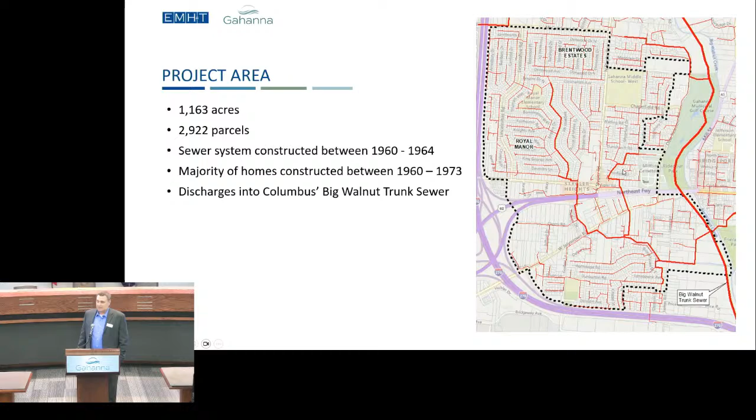Again, I'd mentioned we discharge into the 84-inch, and the red line through the municipal golf course and heading south is the 84-inch trunk line that is owned and operated by the City of Columbus. And the red lines that you see on this map are indicative of the sewer system servicing the entire service territory. So as far as an overall timeline of events, as we went through the subdivision being built, homes then going on the market.

In 1990, there were similar events with backups in basements, as well as depressed driveways. So the city at the time evaluated and worked to mitigate those depressed driveways that otherwise tied into the sanitary sewer system, as well as any foundation drains in that area. It was in 1963 that the City of Columbus adopted an ordinance where the collection system would not permit clean water to enter into the sanitary sewer system.

So any of the rainwater that went into the foundation drains along the perimeter of your property, pre-1963, and even a little bit after that, as that programmatically got implemented across the region, some of the homes had foundation drains tying into the sanitary system.

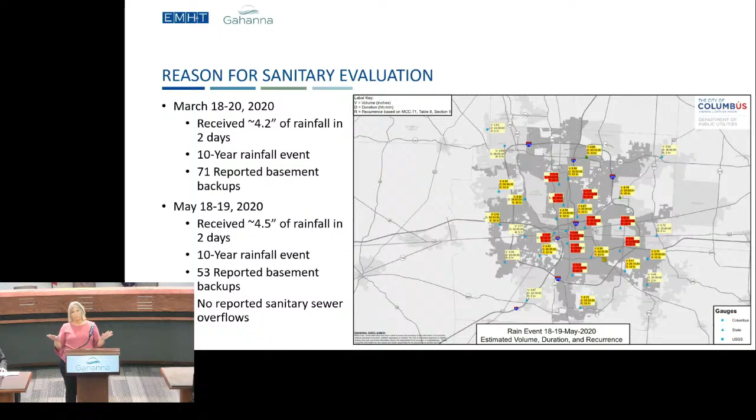But what was important here is we had Gahanna 71 in one event and 53 in the other. There are other communities, one had 700 water in basement complaints in that particular event. So it was very widespread. This wasn't isolated to Gahanna. I just wanted to give you guys that reference. One of the other communities had over 100 in that event. So it was all over. People were getting water in their basements because the system was just full.

So let's talk about the sanitary sewer evaluation, phase one. What took us so long to get here, right? In order to determine what's happening in that system, we have to install flow meters in the actual pipes that will record how the flow comes up and down through your regular average daily flow.

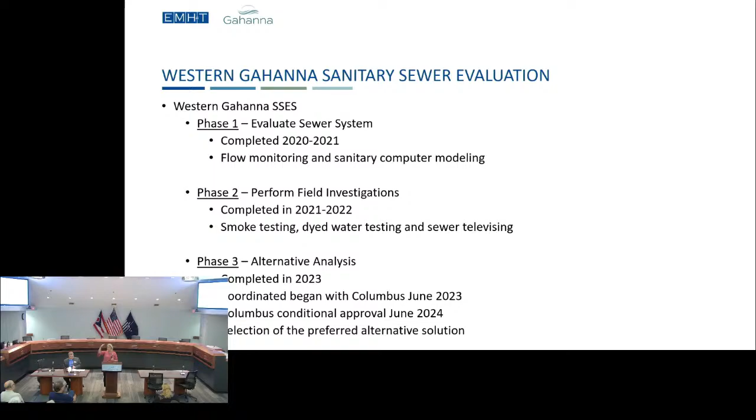So, you know, when you get up in the morning, everybody gets up in the morning, they take showers, water usage goes up, and then it comes back down as people go to work, and then it comes back up in the evening when people are home. So you want to see that, what's called a diurnal pattern, is how the usage fluctuates during any given day, and then what you also want to see is how that system responds when it rains.

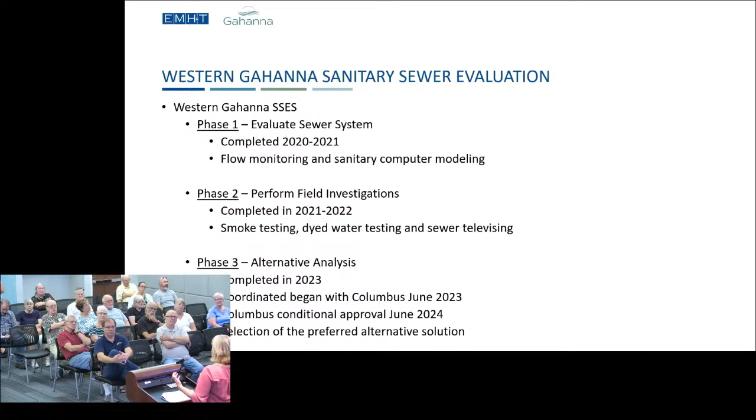So that flow meter data placed throughout the city is what tells us how the system's responding to rainfall. So we take that rainfall data and we put that into a computer model, which will then simulate what's happening in the system since we can't really see it. It's all underground, right? Nobody thinks about the sanitary sewer until it backs up. So that was the first phase.

Flow monitoring periods are anywhere from 3 months to a year, depending on what kind of rainfall data you get during that period. Sometimes Mother Nature's kind, you put the meters in and you get a really big rainfall event, and that happens really quickly, and other times you're in there for a year and you're still struggling to get that rainfall event. So the monitoring period and then developing the flow model took some time.

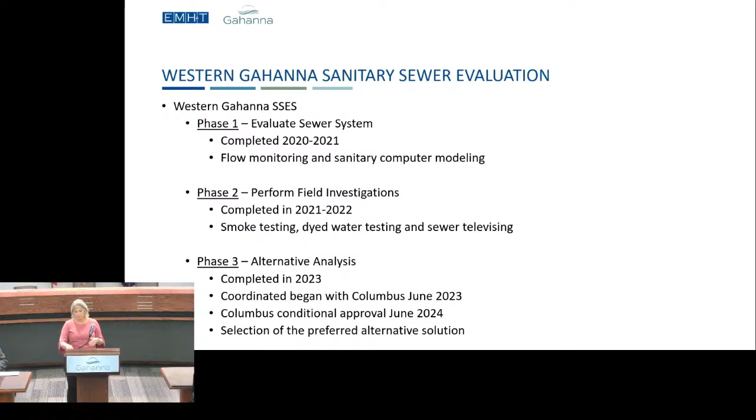Once that was done, we did some field investigations from 2021 to 2022, trying to identify if there were any clean water connections, storm sewers, downspouts, foundation drains connected to the sanitary sewer system. We found none. And then once we went through that, looking for sources of I&I, then you go into the alternatives analysis. Once we try to figure out where's the rainfall coming from, then we go back to the computer model and try to determine how can we solve the surcharging problems. So I'll get into the details of what we did in the next few slides.

Field investigations, what did we do? We went out and smoke tested, looking for any major connections, storm sewers, downspouts, those types of things. So what we do, we put a smoke blower on the sanitary sewer system, we fill the sanitary sewer. Maybe some of you guys remember us being in the area, you might have got some smoke in your house, and that tells us if the smoke can get through, so does the sanitary sewer, so it follows the path of least resistance. So that can show us if there's cracks in the laterals, if the foundation drains are connected, if roof downspouts are connected, or if any catch basins are connected.

Then we followed up with dye testing. One of the things that we see often is where sanitary and storm sewers are running parallel in a roadway, and they usually put like compacted granular backfill, so it's usually like a gravel backfill, which is very porous. And you've got a storm sewer that's not designed to be watertight, and you have a sanitary sewer system that's supposed to be, but a lot of times the flow will pass back and forth between the two of those. We didn't find that either.

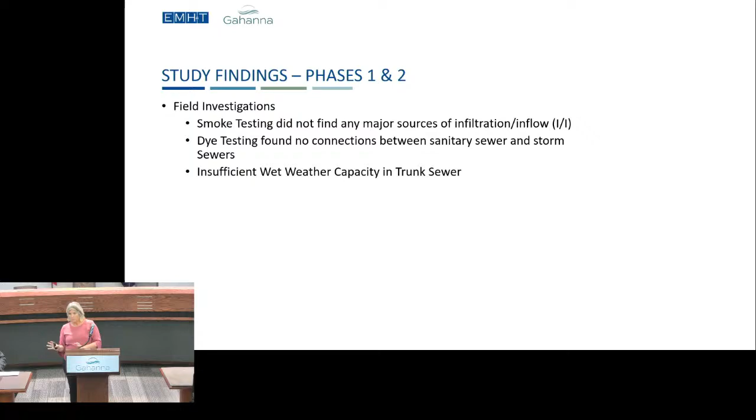I&I, you hear people talk about I&I, that's called inflow and infiltration. Inflow is like a direct connection. That is a downspout, a catch basin, a foundation drain. That's inflow, a direct inflow. You usually see a really high peak that comes in. We did not find those because of the previous work that you guys did in 1990 when there were large backups. They mitigated all of that. They went in, they removed foundation drains. So it wasn't surprising that we didn't see that type of response in the system because all that was previously mitigated by the city.

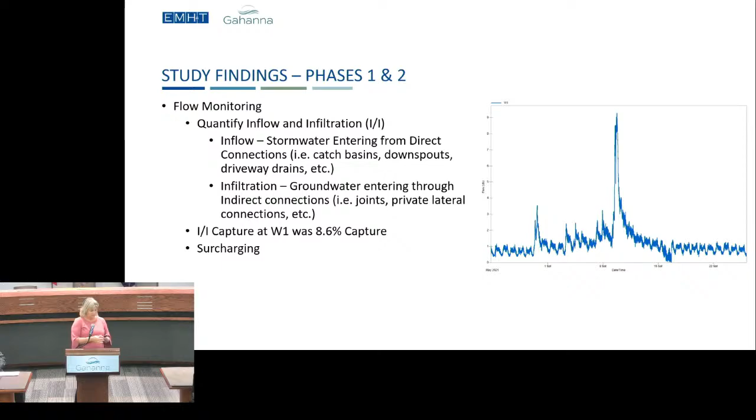So one of the things that we always look at is when the sewer was designed, right? So we already said that the sewer was designed and installed in the 1960s. In that day, sewers were installed based off 10 State Standards, which is what the EPA recommends for the design standard. That is 100 gallons per person per day, which includes an I&I factor, which means you anticipate you're going to get a little bit of stormwater in. And then your peaking factor is based off population. So for larger areas, your peaking factor goes down. So with this being 1,163 acres, your peaking factor goes down from maybe 4.5 down to 2.5. So in that day, the sewers were designed based off of that standard.

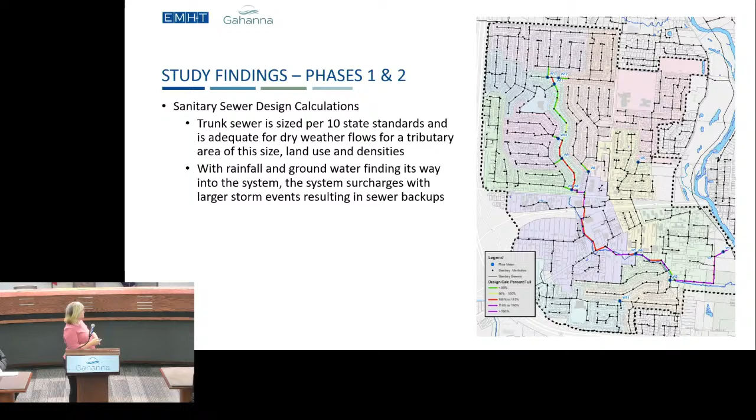So that's what's happening in the system, and I can show you a profile of it. So this is the system. If I drew a line right down the main trunk sewer, and I cut it in half, and we watched what happens in the flow, this is what's called the profile, okay? So these little things here, those are manholes, and this is your mainline sewer pipe. So what this shows with the model is when a 10-year rainfall event happens, so when we get that 4.5 inches of rain, what happens to the sanitary sewer system? It starts backing up.

And you can see how high that backs up in the sewer. So what happens is, where these little red circles here, those are other sewers that come out to service the residents. The whole system starts to back up into there, and then unfortunately it can start to cause backups into people's basements also.

The 25-year rainfall event, so if we throw a 25-year rainfall event onto our model, it shows it gets even higher, to the point where you actually have sanitary sewage coming out of manholes. So this is the situation that we're dealing with and what we're trying to solve. This is the problem we're trying to solve: how do we make this not happen, right?

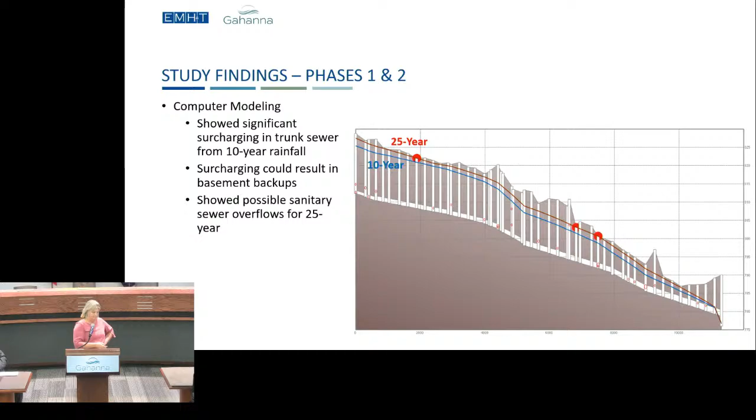Impacts of surcharging during rainfall events. We evaluated it with the sanitary sewer model. These are predicted conditions. Now I want to caveat that. We did not go out and survey everybody's basement. So when we put the model in, we're predicting what's going to happen, but we look at each type of home and we determine, is the basement 8 foot below ground or is it 4 foot below ground?

And then we compare that estimated basement elevation with that blue line that you saw in that sanitary profile and determine which properties are predicted to be within the influence of that surcharging. It does not mean that every blue property is going to get water in basements. And we never saw that many. I think there's 293 properties up there for a 10-year event that could be impacted. We saw 71 in one and 53 in the other.

So this is an estimation, but it just gives you an idea of about where the issues are when it comes to capacity. So we estimated 293, and then there were only 53 reported during that event. Reason being is once somebody's basement starts to surcharge, that hydraulic grade line comes down a little bit. So that's why you can't really predict how many are actually going to get water in basements, but we just let you know which properties are in danger.

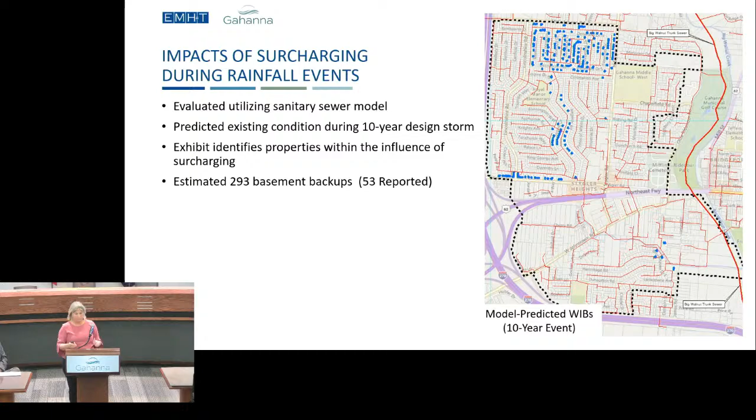Alternatives analysis, what did we do then? We took that model, and our goal is to relieve the surcharging in the system to the extent possible and try to reduce, can't eliminate, the risk of water in basement or sewer backup. We utilized the calibrated model that we talked about previously, and then we ran through alternatives, looking at inflow and infiltration reduction.

Again, a lot of that was already done. We still looked at, can we reduce the I&I further? And it just wasn't cost effective because we would have to basically go onto every property to do I&I reduction, more so than what has already been done. So we looked at lining mainline sewers. We looked at capacity improvements, relief sewers, replacement, pump stations. We looked at containment. We looked at storage options.

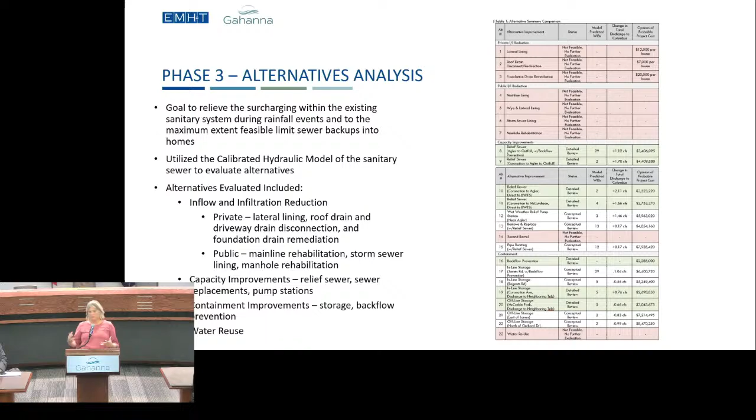Can we store it temporarily until the system has enough capacity? We've looked at backflow prevention. We looked at water reuse. So this list here is the 22 options that we evaluated to try to figure out what the best solution was for the city of Gahanna.

So the recommended alternative that we've come up with is a relief sewer. And basically this relief sewer relieves the sewer at 2 points. One of them is at Coronation Drive up here, and the other one's down here at Imperial. So it basically takes a lot of this flow and pulls it into this relief sewer, which allows the existing sewer and connections to operate within capacity.

So what does this relief sewer do? It reduces the predicted water in basement occurrences or sewer backups for a 10-year event. Why a 10-year? I'll explain that in a little bit. But what happens then with this relief sewer? So this was the red line. This was the hydraulic grade line that I talked about before, which is the surcharging in the system.

And after, with this relief sewer in, this blue line is now the sewer hydraulic grade line. So this is what is happening during a 10-year event. It brings that water level back down as close as we can get into the pipe. So what this does is it increases the flow into Columbus's system, which was the challenge.

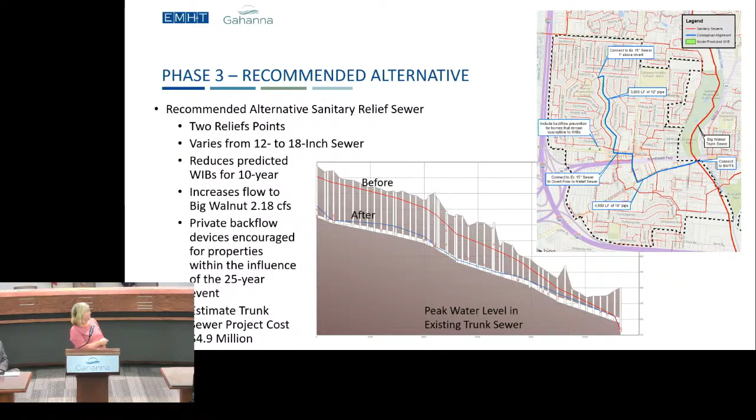So key considerations, things that we want to think about. One, again, the sanitary sewers were not designed to handle the stormwater. The project reduces the risk of basement backups, but does not eliminate it. The evaluation for basement backups was for the 10-year. We did do an evaluation for the 25-year just so that we understood the impact, and I'll show you that slide in a minute. The larger events may still trigger a basement backup.

Again, if you get 8 inches of rain. I happened to be camping up at Port Clinton last year, and we got a 500-year rainfall event, 8 inches of rain in 8 hours. If that hits the system, this relief sewer is not going to solve the problem.

And then the city does have limited discharge to Columbus. So we don't have basically an open checkbook that says we're going to put a 36-inch sewer here and we're going to send all this flow to Columbus. We can't do that. Columbus is not going to accept rainwater through the system. So we had to go through the process, which I have a slide to talk about too. So City of Columbus system, again, 10-year level of service for basement backups, 25-year for sewer overflows. We can't exceed what City of Columbus is designing for.

So this is basically the 25-year event. We ran that, and we did that same basement evaluation. The one on the left is what it looked like before the relief sewer, and the one on the right are still the areas that may possibly have a concern. This is within inches. If you're a couple inches higher than what we're predicting, in order to determine exactly which homes, you would have to do a very detailed survey of everybody's basement, get inside the house, do measure downs, way more than what we did here.

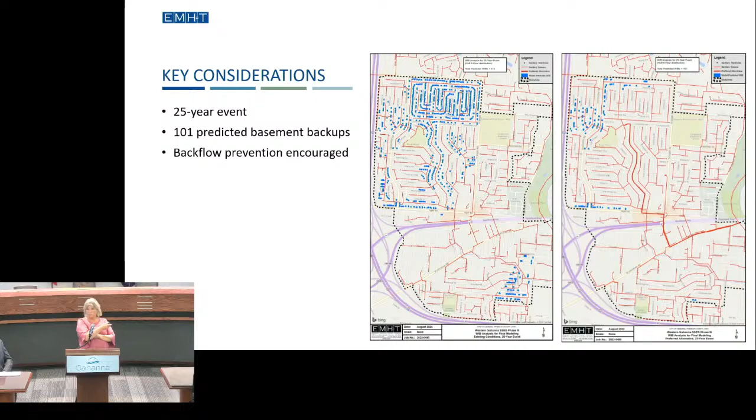So the Columbus coordination, when we first went to Columbus, they said absolutely no, because when they evaluate flow into their system, they look at the entire system: are we increasing sanitary sewer overflows downstream? So their first response back to us was, no, we cannot send an additional 2 CFS to their system because 11 and a half miles downstream we're causing increased manhole overflows. So they look at the entire system for manhole overflows, and are we creating any additional water in basement backups in Columbus's system when we put this relief sewer in?

So they had to go through their own modeling process. We started coordinating with the city of Columbus in July of 2023. That was the first meeting that we had. We had to give them our model, our proposed recommendation, and then they modeled it. They came back June 4th of this year and finally gave us a conditional approval to do this relief sewer.

For this conditional approval, the City of Columbus is working on some capacity improvements within their system, one of which is putting in a control gate that will shut off flow from New Albany, basically store it in their system, and then relieve it at a later time when the system can relieve itself. So once that control gate is in place, Gahanna is able to proceed with their sanitary relief sewer. First quarter of 2026 was when we were authorized to actually start construction, and not before that.